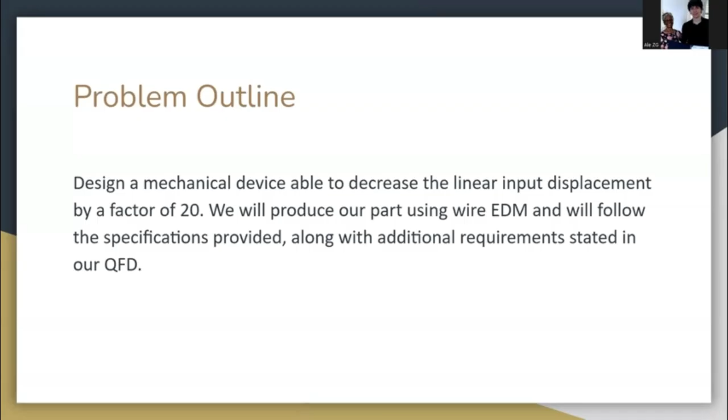So to start, we made a functional decomposition of our device. It consists of an input mechanism, an output mechanism, the de-amplification mechanism, and the mounting part.

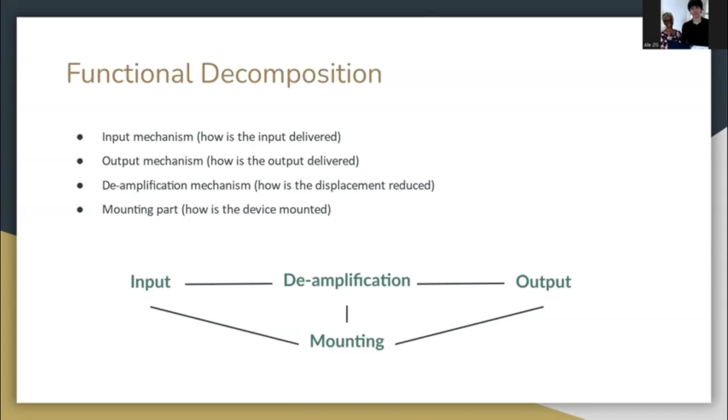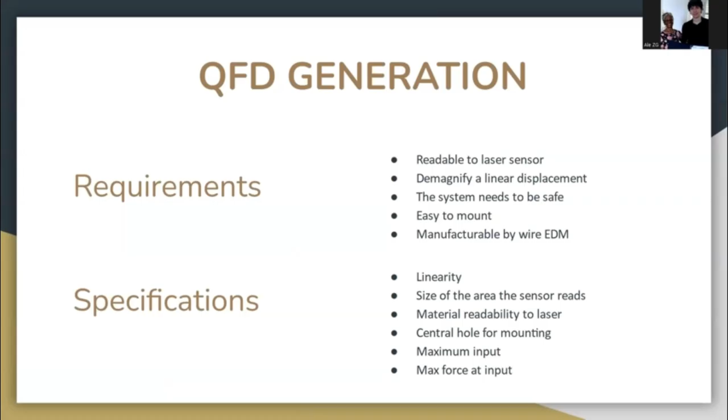Next, we went to the generation of the QFD, in which the requirements describe the goals and the specifications provide the detailed solution. For us, a very important requirement was that it be manufacturable by wire EDM, and a very important specification was the linearity of the device.

Here is the complete QFD. Our system must be able to displace more than the minimum required, using as little material as possible so that the mass of the device is not too high.

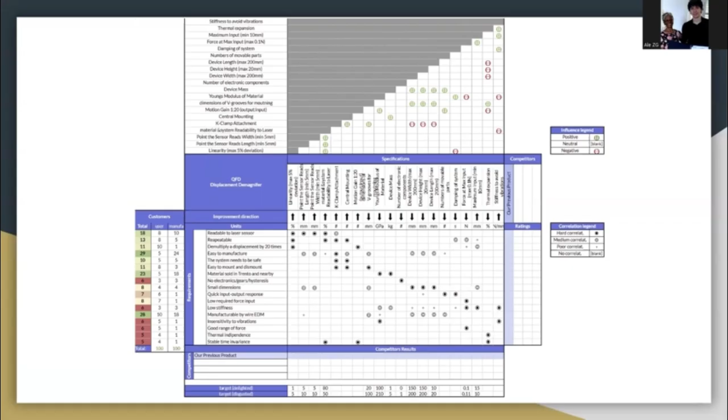Other specifications we want to give great weight to are the absence of mechanical hysteresis and that it be as thermally independent as possible. Here we have the specification over the specification.

This part is important to denote the specification which affects our system the most.

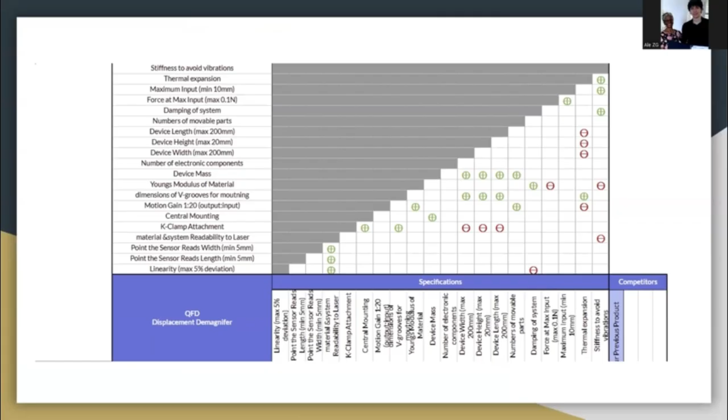From the requirements, the very important ones are that it be repeatable, have small dimensions, be readable to the sensor, and be manufacturable by electrical discharge machining. For our customer, the manufacturer, the important requirement was an easy to manufacture device.

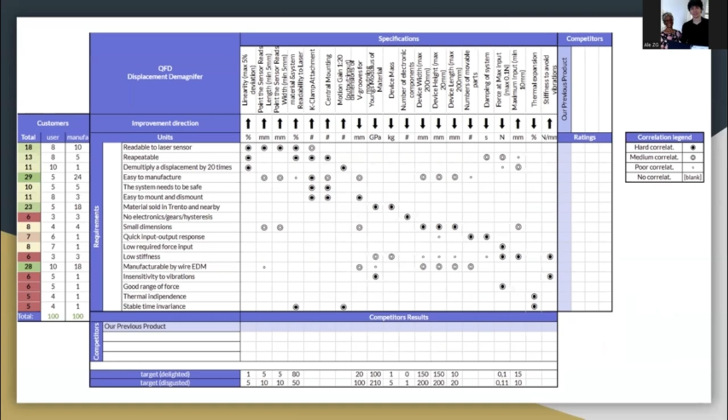The Kelvin clamp we had designed was designed with a 0.5 millimeter distance from the base of support.

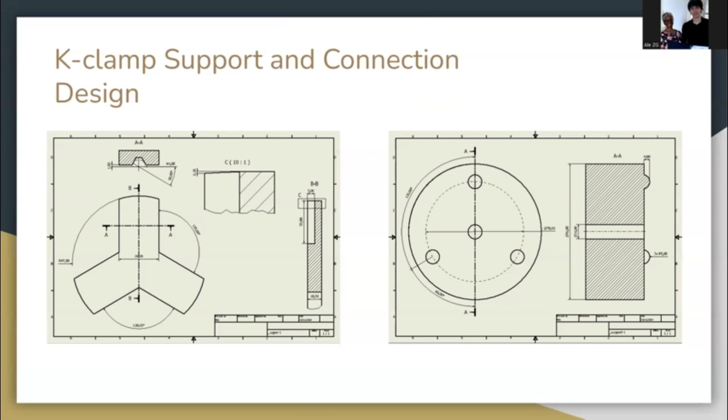Then, to optimize the use of space, we opted for a Y-shaped design. The V-groove, initially proposed with a trapezoidal shape due to material thickness constraints, was then abandoned in favor of a simpler machining process with a generic sizing decided by the manufacturer for all the projects.

From the lecture, we took inspiration from some concept ideas: an asymmetrical soft spring attenuation and a stiff spring attenuation. The concept focus is about having a stable and fixed joint to the support base.

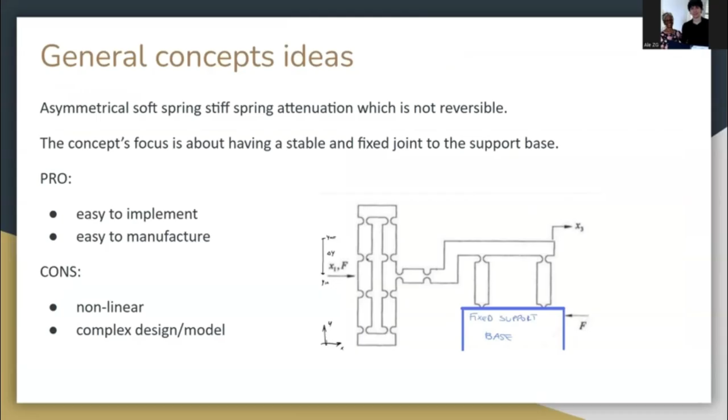This was our first design, which consisted of rotating levers. Our second one is a planar spring fixed to a structure.

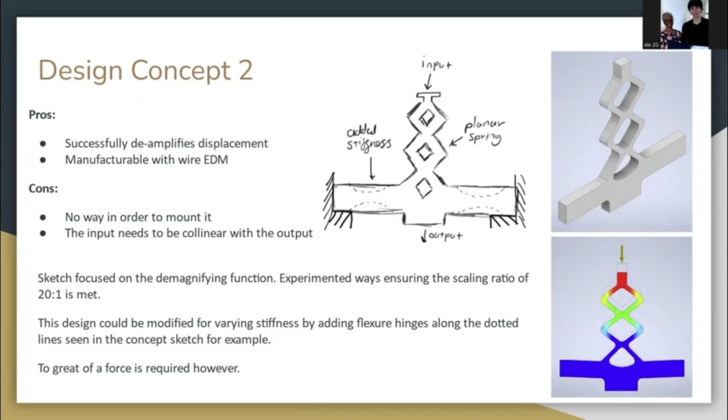The sketch focused on the demagnifying function, which was designed to ensure a ratio of 20 to 1. The design could be modified for varying stiffnesses by adding flexure hinges along the dotted lines in the concept sketch. However, a big drawback was that a great force was required.

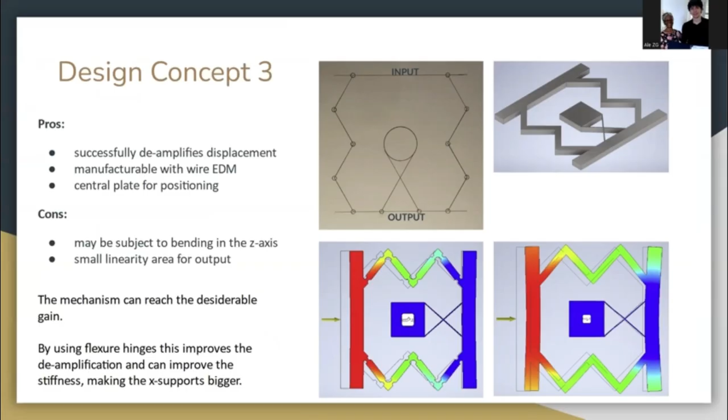The third design included flexure hinges to improve the de-amplification. These were some ideas to increase linearity at the input and output of our demagnifier, which sadly were not able to be implemented.

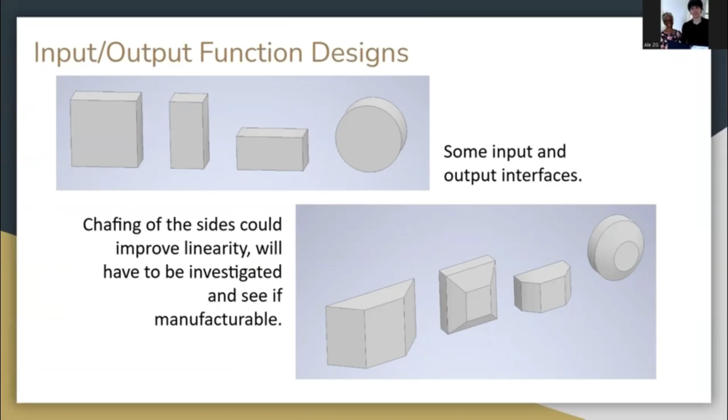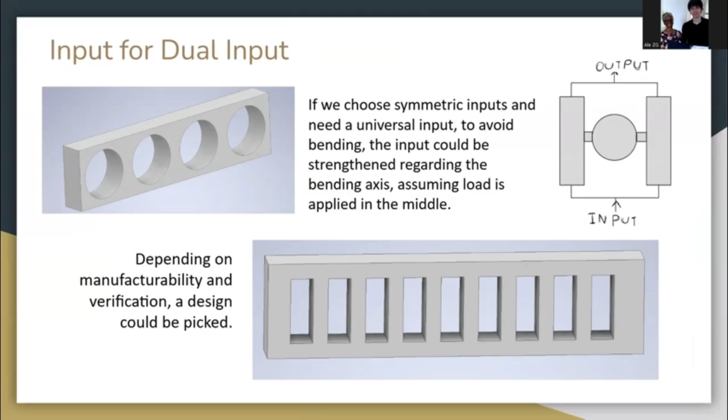This was also another idea we wanted to implement to increase the range of operation of our device, but it was also not implemented in the end. This was our concept 4.

This is a system with hinges in which only the use of a leaf spring allowed us to achieve the required stiffness values. Symmetry ensures a linear movement of the output surface, while the lightweight and compact design provides great mobility and effective absorption of the initial displacement.

An additional advantage is the alignment of the input and output along the same axial line, which facilitates precise positioning in the laboratory.

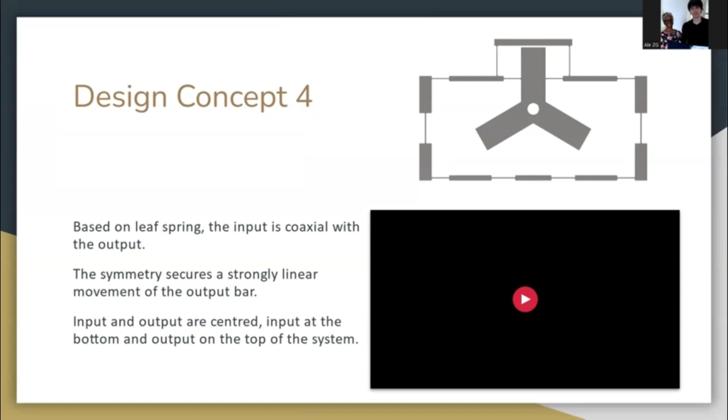The proposed system offers several advantages, including ease of manufacture, linear output, and a compact yet stiff design. However, there are significant challenges, such as difficulty in directly simulating the system and predicting the behavior of the leaf spring due to its non-fixed center of rotation. Additionally, the weak attachment to the K-clamp support further complicates its stability.

Then we proceeded to implement a decision matrix. This was used to choose which of the four concepts was the most suitable. In the columns, we have the concept orders from 1 to 4. The first column is the datum, which corresponds to concept 1.

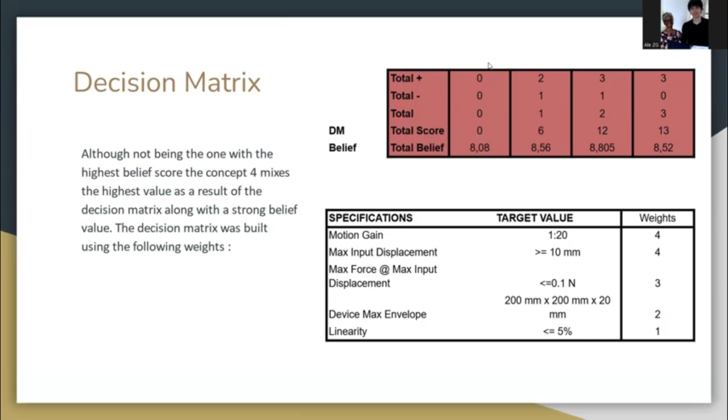Then, with the belief map, we could have a summary, an average of our belief maps. Each member drew their own, and this is the average of all of them. This shows that all our concepts were similar in terms of belief, due to them being based upon almost the same principles. So they were all similar and almost equally good.

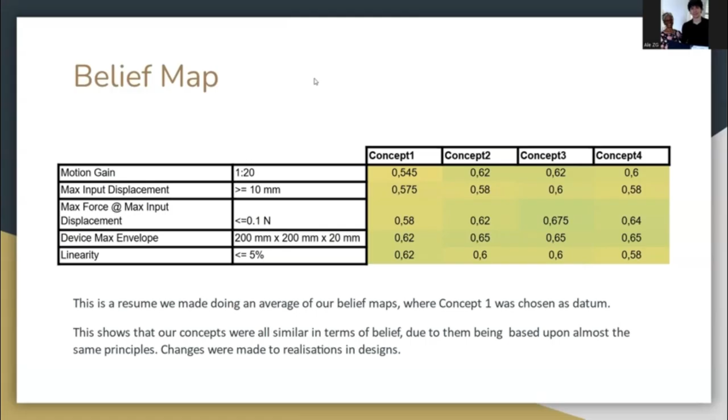So at the end, the chosen design was a mixture of the third and the fourth concepts. Based on the soft spring, stiff spring attenuation principle, the system is symmetrical with the input applied at the center and the output taken from the top left point.

To control stiffness distribution, the hinges near the output are thicker and stiffer, while the base hinges are thinner and more flexible, allowing for better absorption of the input displacement.

Additionally, the design offers modularity in the output, since the top section behaves like a lever. Adjusting its length modifies the output amplitude: shortening it reduces the output, while lengthening increases it.

Given that the lever rotates by only a small angle, we can approximate its behavior as linear. The combination of stiffness variation and lever-based modularity ensures a well-balanced and efficient design for our concept.

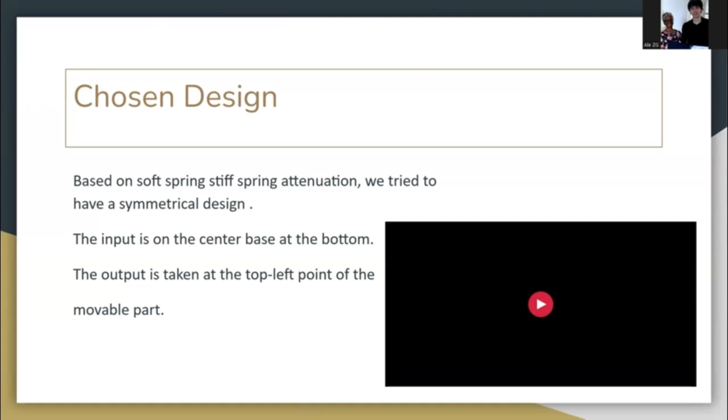The final design is stiffer compared to the fourth concept, allowing for more precise and repeatable results, even if it was a combination of this design and another.

Due to the high number of hinges, the system exhibits some oscillation. However, reducing the number of hinges was not an option, as it would have limited the output displacement, falling outside the required criteria of a minimum input of 10 millimeters.

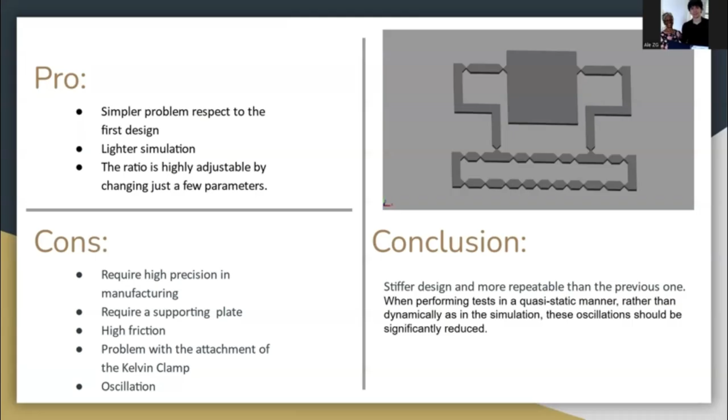That said, when performing tests in a quasi-static manner rather than dynamically, as in the simulation, this oscillation should disappear. This was the Simulink simulation of our output over the input, and when we calculate the ratio, it is consistent with a value of approximately 20.

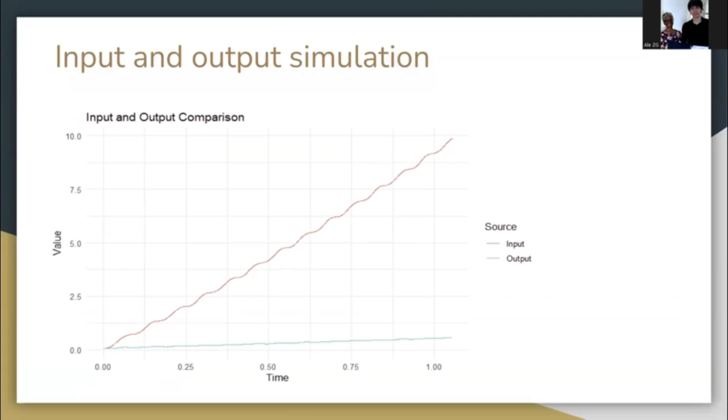Then the cutting of our system was performed with the electrical discharge machining machine. The main challenges related to this process are primarily associated with its duration, influenced by two key factors: excessive ionization of the water in which the machine operates, and a high number of interruptions caused by short circuits, likely due in part to the high conductivity of the water.

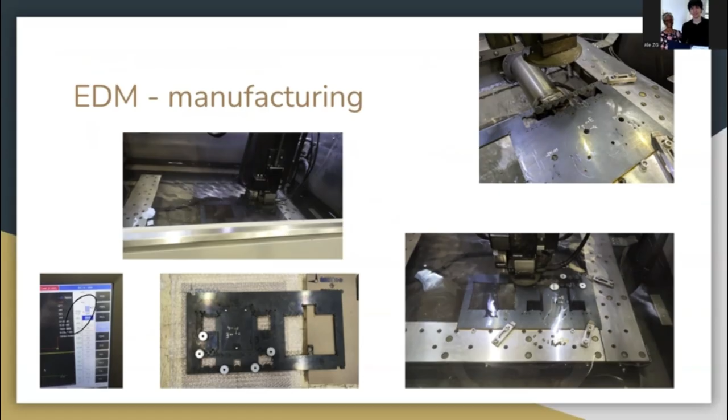Then we went to the laboratory to take our tests. We randomized measurements between input taken in a continuous manner, a step manner, and the noise in no input conditions.

Also, we had issues during the laboratory experience, like the dimension of the V-grooves not being fully compatible with the support. Also, due to thickness mismatches affected by the assembly, the main problem was in the V-groove support.

Additionally, we were forced to add a plate under the mechanism, which shifted the center of mass out of our clamp, which was not initially in our design, of course.

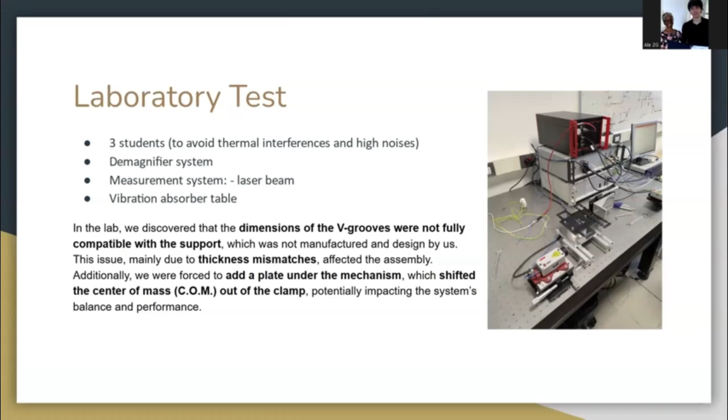Then here are three photos that show our mechanism during the taking of the measurements. We took a total of 9 measurements: 3 continuous, 3 step measurements, and then 3 with no input just to measure the noise.

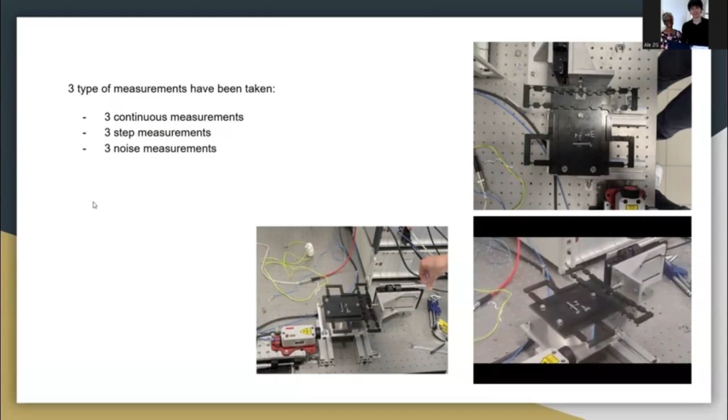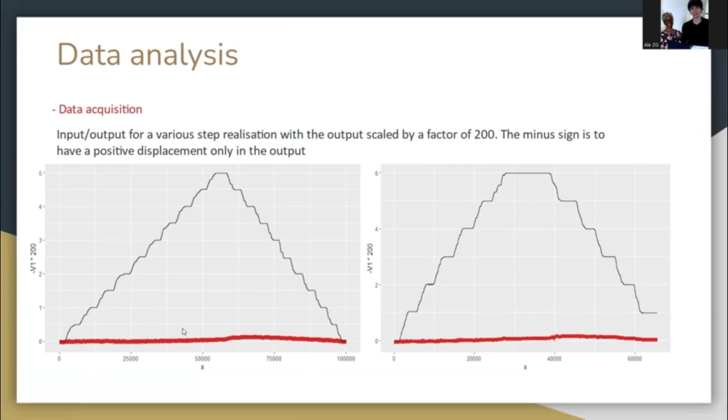Then when we analyzed the continuous experiment, we noticed a step during the output. This can be associated with static friction behavior.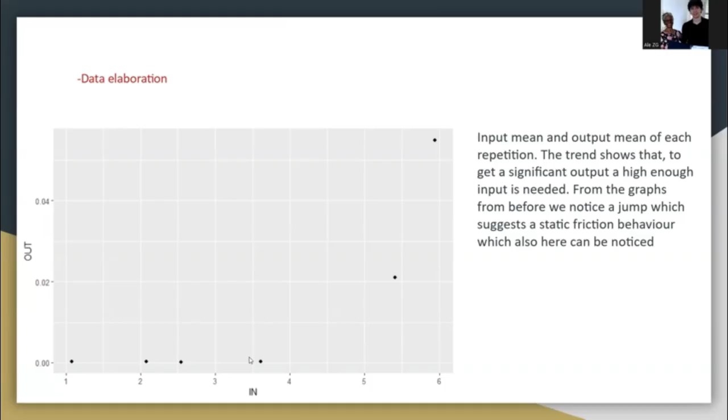Then from the graph before, there was a jump that suggested static friction behavior, which can also be noticed here: if the friction is not overcome, we don't get any output response.

So then we tried to do a linear fit regression to test the linear behavior, and from the residuals we see a U-V pattern, which suggests an underfit. So we tried a higher order polynomial.

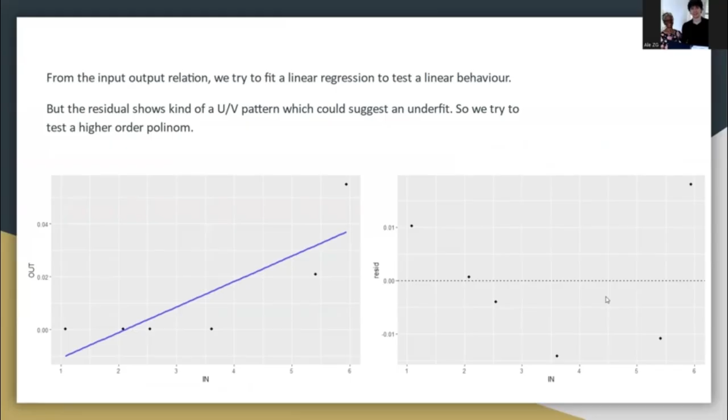So with the quadratic regression, we achieved a more accurate representation of the system. And by seeing the residuals, we see no pattern. So our model behaves more quadratically than in a linear way.

This is also coherent with the theory of static friction: at low inputs, we have almost no output response, and the greater the input, the more the output response.

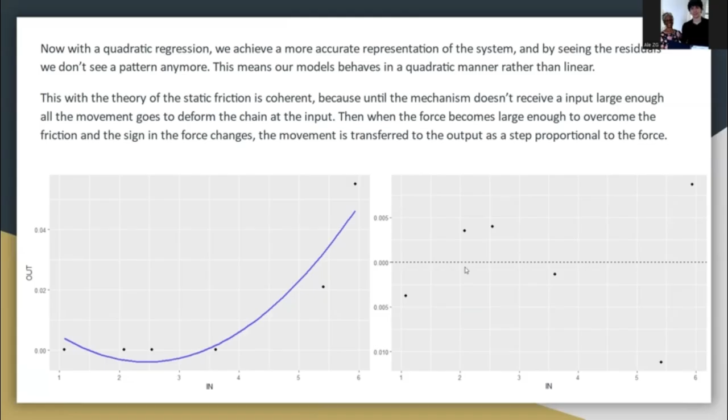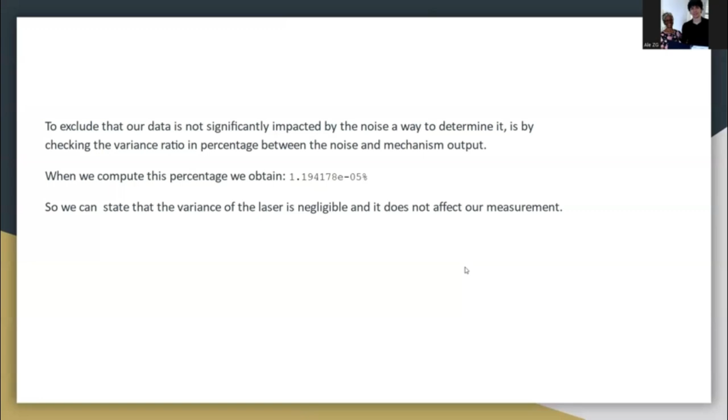Then to exclude that our data is significantly impacted by the noise, a way to determine it is by checking the variance ratio in percentage between the noise and the mechanism output. When we compute this percentage, we obtain a negligible value.

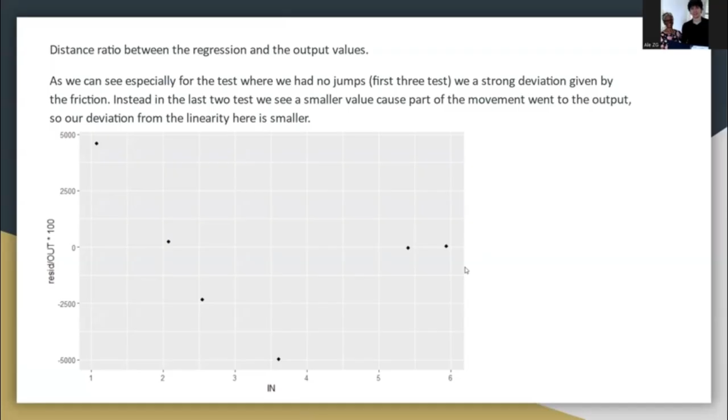Then here we calculated other useful information, like the mean of input over output and the root mean square, which give us more data on how our data behaves. These measurements are in nanometers.

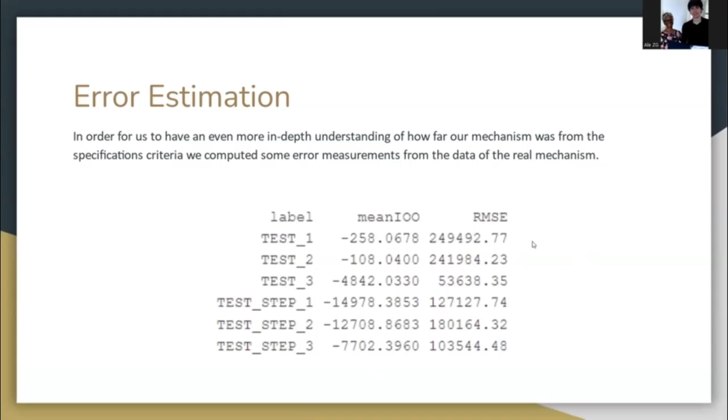Then from the data analysis and the laboratory experience, we can say that our device was affected by a significant component of static friction, which affected the reduction of our system.

So to obtain a linearly better result and overcome the issue of friction, some measures we've thought about could be: add more lubricant so the device can freely slide over the support plate; put a separator between the device and the plate to allow free movement in the mechanism; or add more supports to the mechanism so there is no more need for a support plate, which avoids the system bending over its own weight.